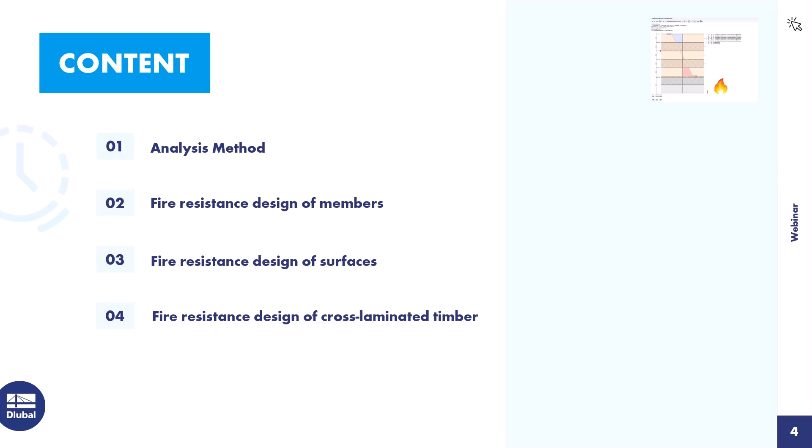We will switch to the program and I will show you the settings directly in the program. But the main focus today is the theory, so that you will understand the background of the Eurocode, how everything works with the charring and with the design afterwards. So we start with theory, then we switch over into the program, we check a few members, we check the design of surfaces, and at the end we will design cross-laminated timber for fire design. Okay.

So the first topic today is about the general requirements. This content here comes from the Bavarian building regulations, and I am sure it is similar in your country. It does not make sense to have a more detailed look into any regulations because we have so many people here from so many countries and every country is a bit different. But I guess in general this sentence says everything, so that's why I read it.

Buildings must be arranged, constructed, modified and maintained in such a way that the outbreak of fire and the spread of fire and smoke are prevented, and that in the event of fire the rescue of people and animals and effective firefighting operations are possible. And I guess it is clear to everyone that this is our big aim.

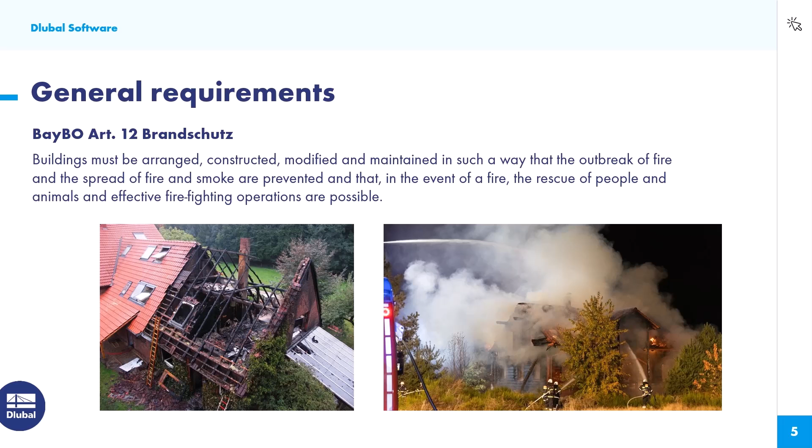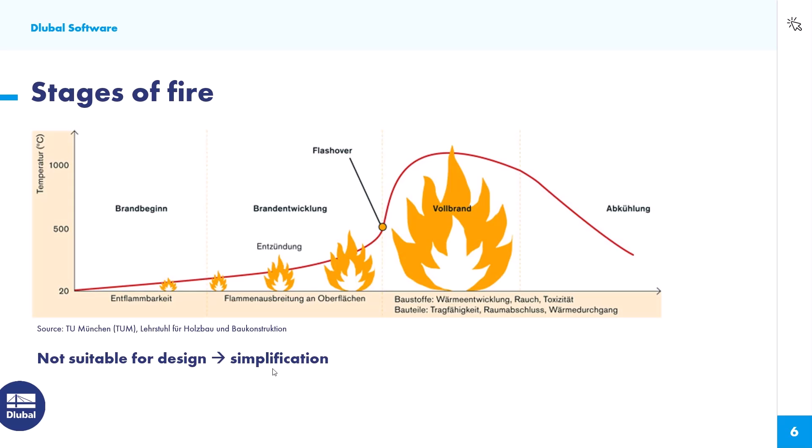Okay, so then we need to talk about stages of fire. The first stage is the non-flaming smoldering before it goes over to the developing fire stage. Then we get the flashover, where we receive the fully developed fire, before it comes to the decay stage. And of course, when we think about this red curve here, you can imagine that this is hard to simulate in a structural analysis. That's why we need a simplification, and how this simplification looks you will see in the next slide.

It's the content of the Eurocode 1, of course not the whole content, but the important content. It's about nominal temperature-time curves. Here we see the standard temperature-time curve. There are a few more temperature-time curves, but for timber and especially for buildings, only the standard temperature-time curve is of interest. That's why it's the only one listed. We see the equation of the time curve. It's a logarithmic function, and the variable is t.

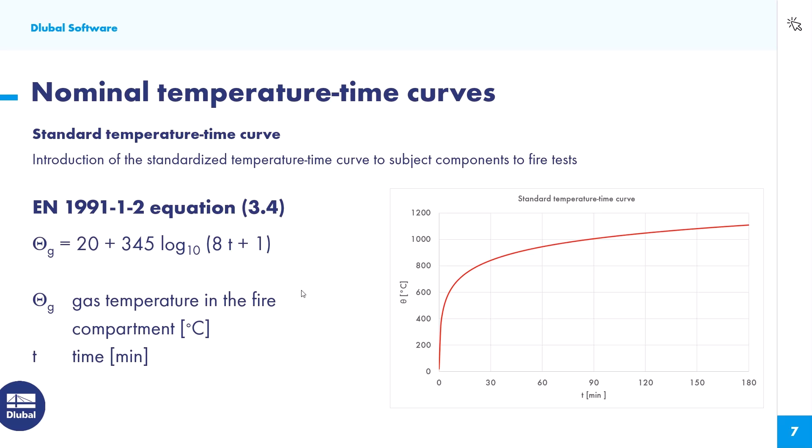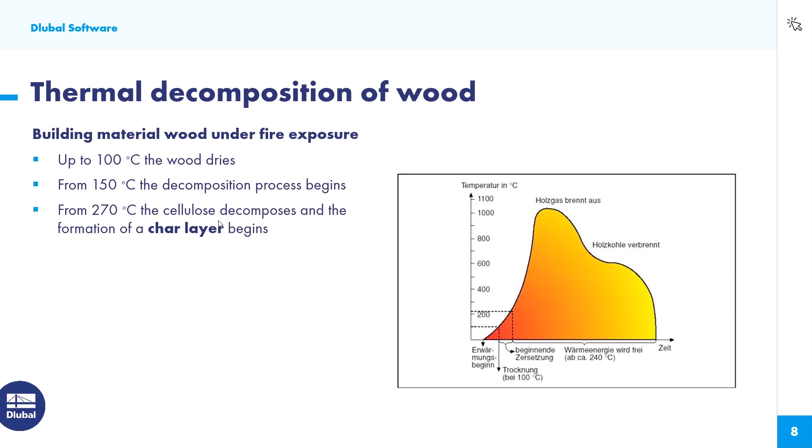Next slide is about thermal decomposition of wood. I guess it's clear to everyone that in the beginning the wood begins to dry. This is up to 100 degrees Celsius. From 150 degrees Celsius, the decomposition process begins. So we are around here. And it has its peak at around 270 degrees Celsius, where the cellulose decomposes and the formation of a char layer begins. This char layer plays an important role, and it's actually the key for our timber design. That's why it's in bold letters.

A few properties of this char layer. This char layer has a lower thermal conductivity than unburned wood. That's why it delays the charring, and hopefully a residual cross-section remains. And that's the reason why we have a very favorable behavior during fire in case of timber. As you see here, when you check the cross-section after a few minutes, I don't know how many minutes these are, maybe 30 or 60, you will see that the timber inside is still brand new.

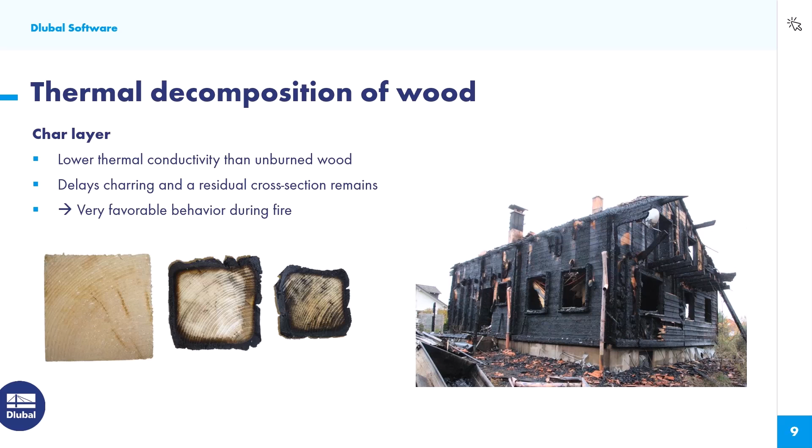Fire resistance classes. So I don't want to spend so much time on it, since I guess that's clear to everyone. We have these classifications. We have load-bearing components and non-load-bearing components, but of course we are focusing on the load-bearing components in our structural analysis. And we need to consider integrity or not. That depends on, of course, the building code or whatever.

In the new Eurocode, this plays a more important role, and also we are focusing on it in the future, but for now we have no integrity. Or we do not prove any integrity, since it is actually not a design check in terms of structural analysis, but as I mentioned, it becomes a more important role in the new Eurocode.

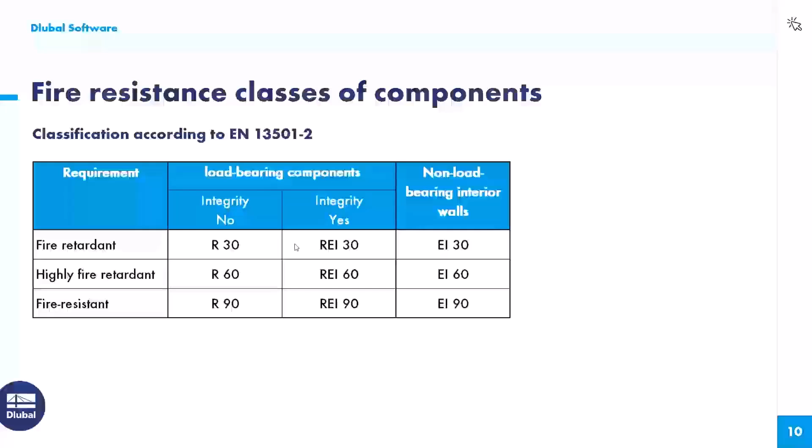Okay, fire retardant, highly fire retardant, fire resistant. I guess that's clear to everyone. We talk about R30, R60, or R90, or R120, and so on. The indexes here are described on the next slides. I don't want to spend much time here. Please check the video afterwards and pause it. You will be able to read it in detail. What we're talking about today, we're focusing only on the load-bearing capacity.

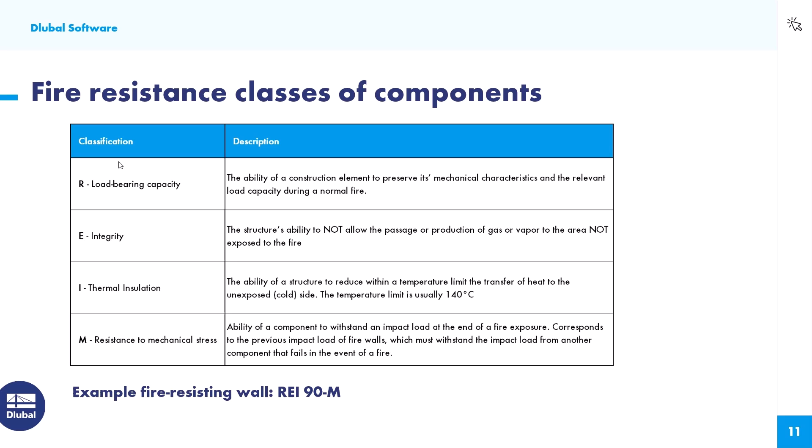Okay, so now let's start actually with the structural analysis part. Combination rules for actions. So we need to know which loads we can or we have to consider in case of fire design. In this case, we have to look into Eurocode 1, which refers to Eurocode 0, chapter 6.4.3.3. And this is nothing else than the extraordinary design situations.

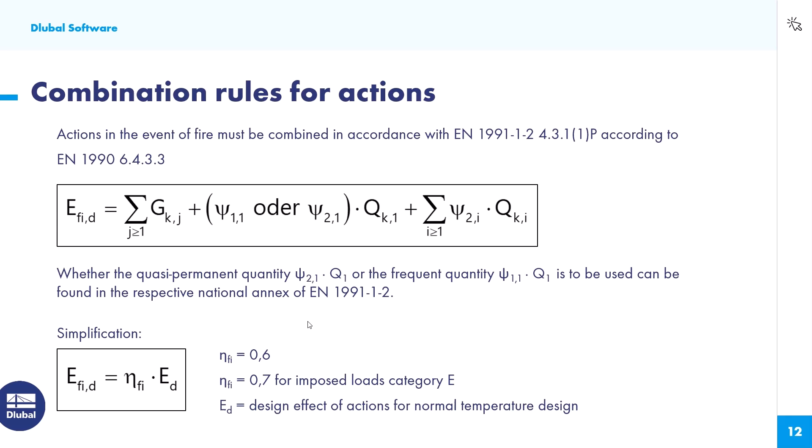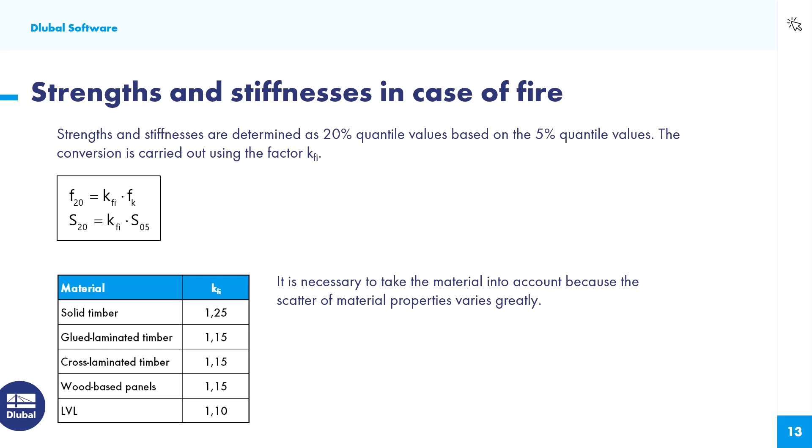Fortunately, there is no additional value in the material standards. They used this conversion factor k_fi, which helps us to keep this database as small as possible. And you see the 20% quantile value is dependent on the material. It depends on the scatter of the material properties, because it varies greatly from solid timber to glulam, for example. And I guess it's clear that the properties scatter because of branches and cracks. Okay, that's it.

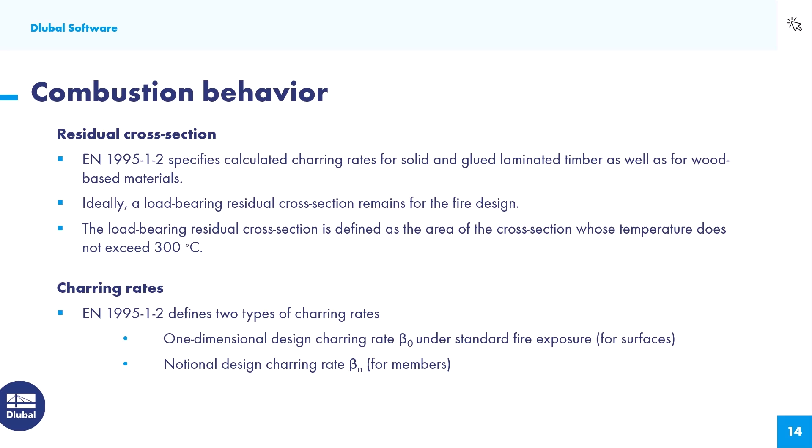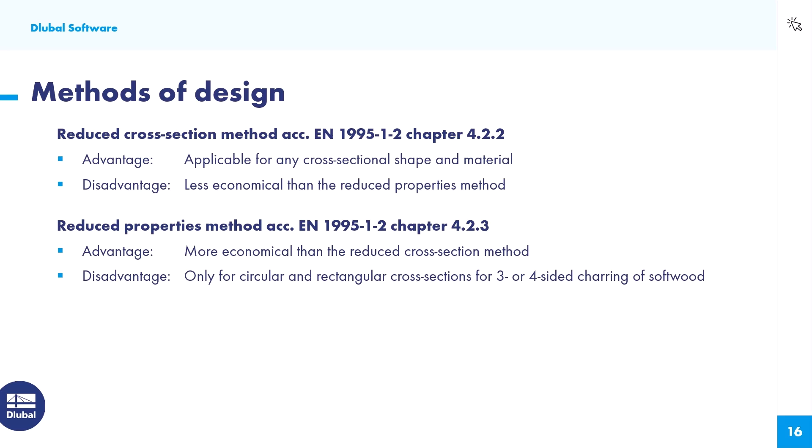softwood as well. Actually, the reduced section method can be used only when we talk about surface design. For example, for CLT, the reduced section method needs to be used. In our program, we consider only the reduced cross-section method, but maybe in the future I'm thinking about also introducing the reduced properties method, since the amount of work is not so high. So I'm thinking about also taking over the reduced properties method for the member design.

Okay, let's have a detailed look at the different design methods. Here we see the reduced cross-section method. We have the initial surface of the member, and it's getting reduced to the residual cross-section by the charring rate multiplied by the time. And since the area between the blue and the yellow line here has also an increased temperature already, and therefore a reduced strength and reduced stiffness, this area should also be neglected.

That's why, for times higher than 20 minutes, the factor k0 is 1 and d0 is 7 millimeters. So additionally we add 7 millimeters to our charring depth. When we go to the strengths, we have a kmod,fi factor, but do not interchange it with the kmod factor from the cold state design, where we have the kmod factor dependent on the load duration class.

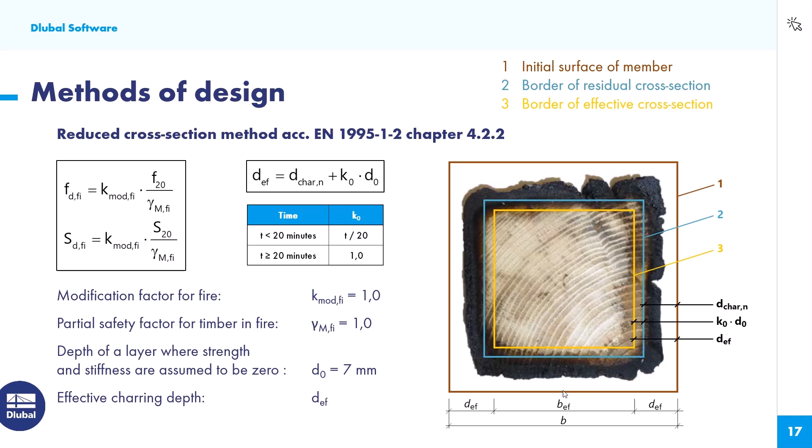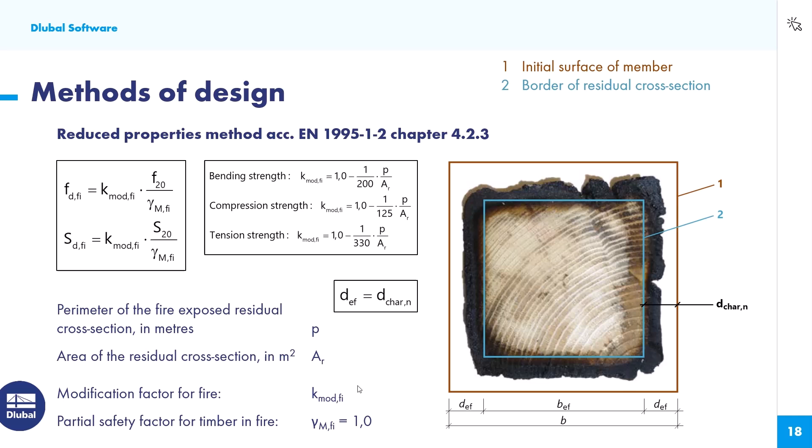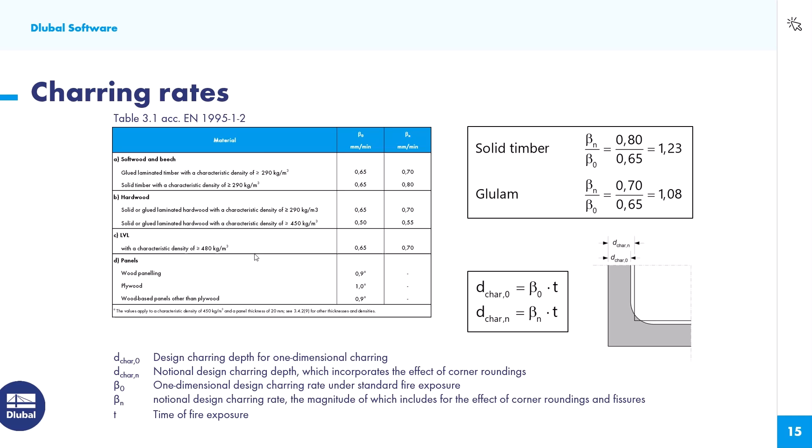Okay, that's it. Let's do a small example for this ceiling beam, which is softwood C24, 140 by 240 millimeters. The fire resistance period should be R30, and the charring should be on 3 sides: left, right, and bottom. So we calculate our charring depth, multiplying the beta n factor from table 3.1. It's this table: solid timber, which is C24, we have 0.8. And multiplied by the time, in this case R30, meaning 30 minutes.

We get 24 millimeters. And we additionally add 1.0 times 7 millimeters, and then we get an effective charring depth of 31 millimeters. Now we take the 31 millimeters 2 times and reduce it, and we get 78 millimeters for the width. For the height, 240 millimeters minus 1 times 31 millimeters equals 209 millimeters. Actually, it's really simple. Okay, then let's switch over to RFEM.

So I'm sorry, maybe I should... I'm sorry. I have loaded the wrong files.

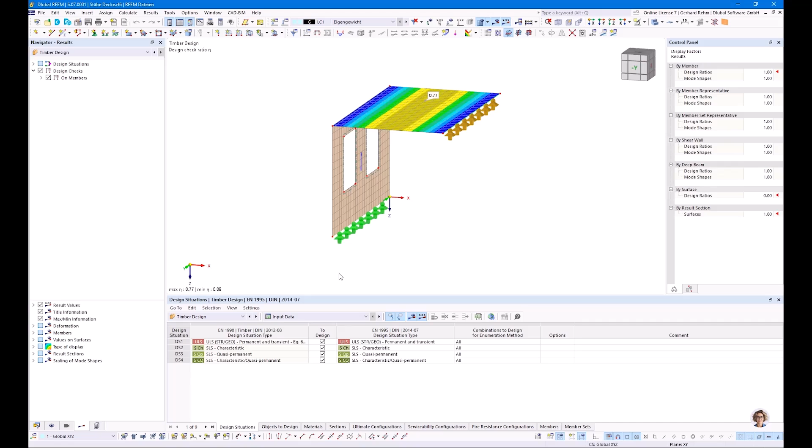Because they were already finished, and of course I want to start directly when our ULS and SLS design is fulfilled. So we see this floor here. I have shown this floor with different variants in another webinar, I guess a year ago or something. You will find this webinar also on our website. And now, of course, I want to extend it for fire design.

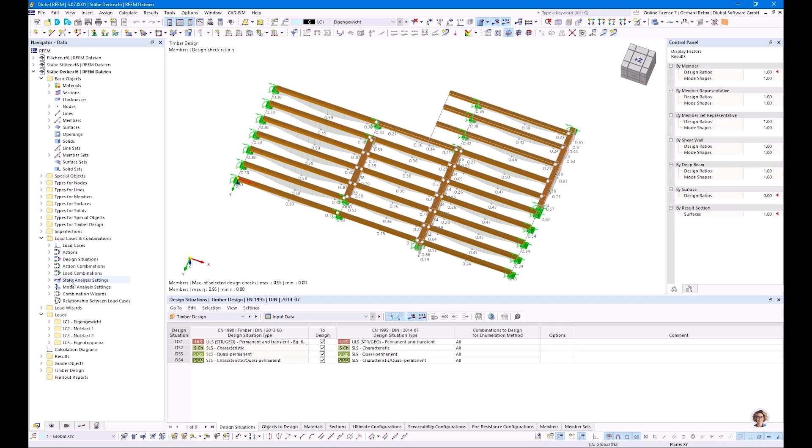And what we will do is we will add an additional design situation, because we need our actions in case of fire. Okay, so I added the design situations here, and I will add another design situation. In this case, I select accidental fire. Watch out, there is also accidental without fire, but this should be used for example for an impact load or something. In case of fire, please use this one here. It depends on the national annex.

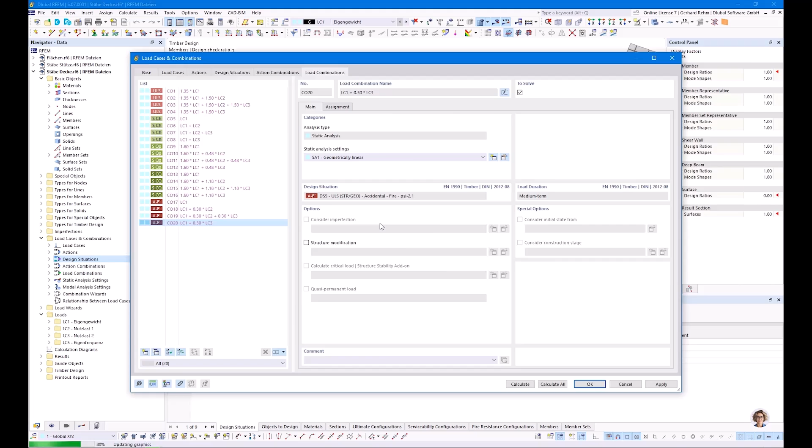Since we have only imposed loads and I use the German annex, I will use psi 2 in this case. Okay, and then we get our load combinations for ULS, cold state, and also the fire state, where we have imposed loads, dead load, and imposed loads on different spans. Okay. Of course, timber design results need to be deleted. We want to add fire design here.

All right, let's have a look at the floor beams. In this case, a fire resistance config was automatically assigned to it. So in case you don't receive any results for fire design, please check if a fire resistance configuration was defined here. Let's have a look at it. Okay, so there are different tabs for members, surfaces, and some standard parameters. So in this case, it's exposed to fire on 3 sides, so not the top side. And we check it against 30 minutes.

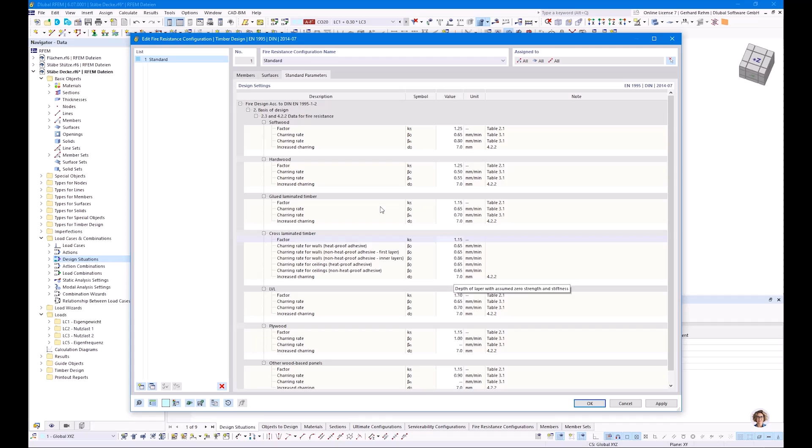And when we switch to standard parameters, you will see all these beta factors for different wood and for different timber material. Okay, and you are able to change these values in case of some special settings from some special approval or something. Okay, so that's actually it.

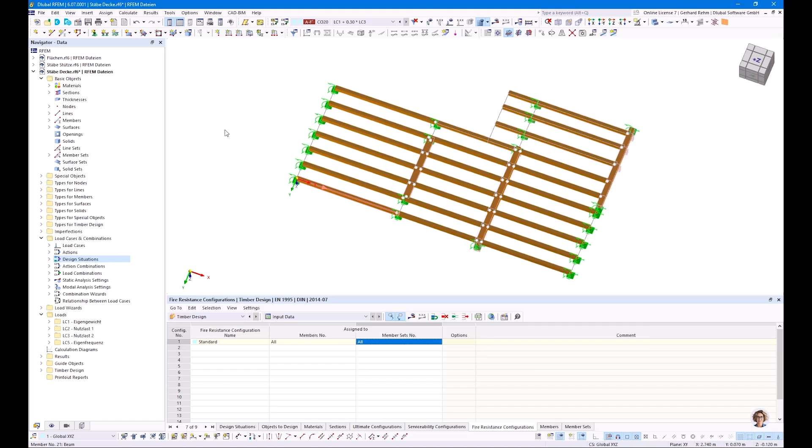So here we can also check which fire resistance config is assigned. So in this case, config 1 is assigned to all members and all member sets. Of course, if some member has a different setting, you can simply switch it here in this design configuration tab. And here you can also create new configs. Okay, so that's it. I guess for now I will run the analysis.

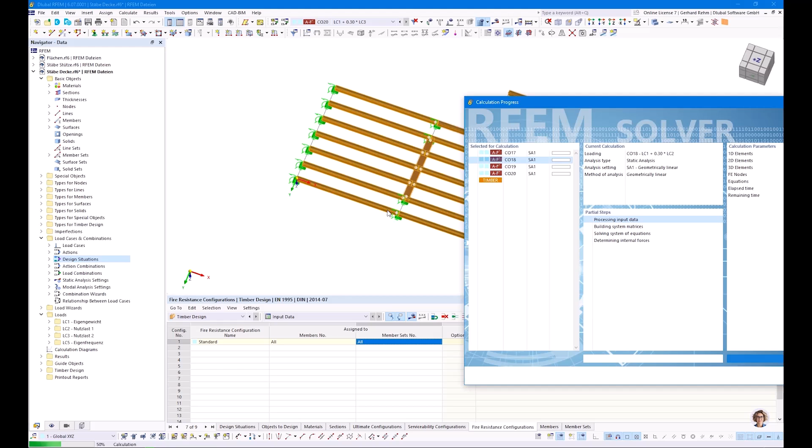And then we will check and compare, because the floor beams here, the ceiling beams, have exactly the same section like my hand calculation. So we had 140 by 240 millimeters. Okay, so let's focus on, it does not matter. We don't take care of the numbers for this example. Let's check this member here, and we check fire resistance. Let's check bending. And let's have a look at it.

So it's not so interesting. We only see how the characteristic value is transferred into the 20 percent quantile value. So we increase the characteristic strength by factor 1.25. So it's okay. And k mod fire is 1.0, and also the partial safety factor for fire is 1.0. Here we get the information about the fire resistance.

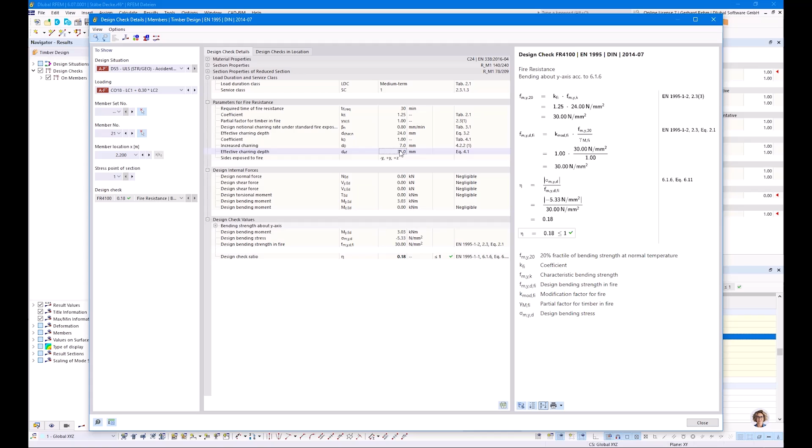So we have a t required of 30 minutes, and we have beta n of 0.8 millimeters per minute for this material, multiplied by 30 minutes equals 24 millimeters. We add additionally the 7 millimeters, and we get an effective charring depth of 31 millimeters and an effective section of 78 by 209 millimeters, which was exactly the same value like in our example here. Okay.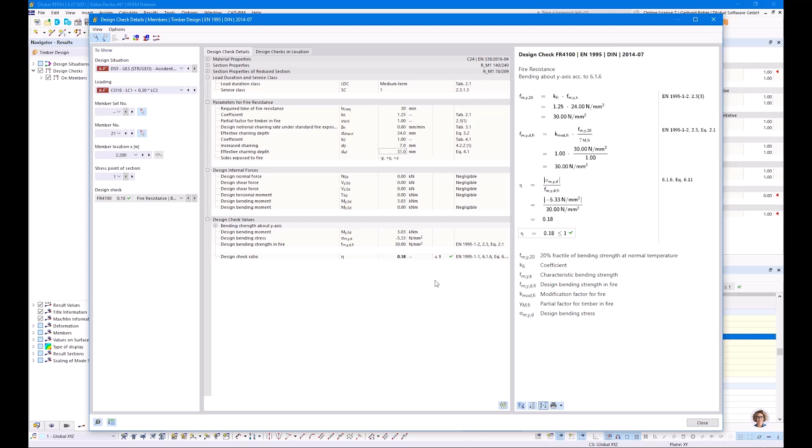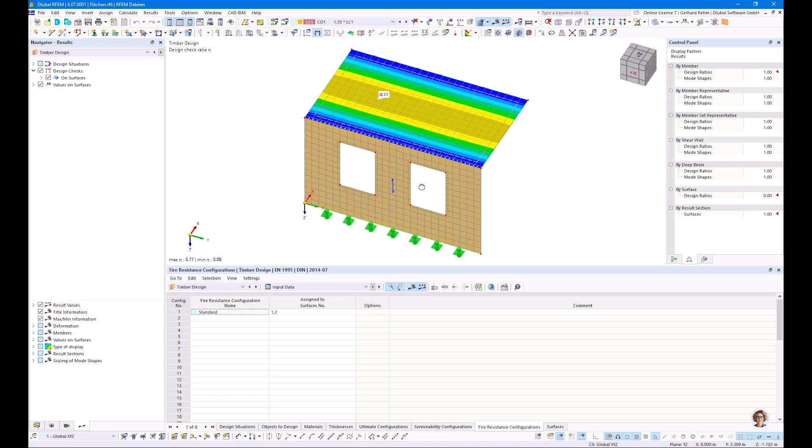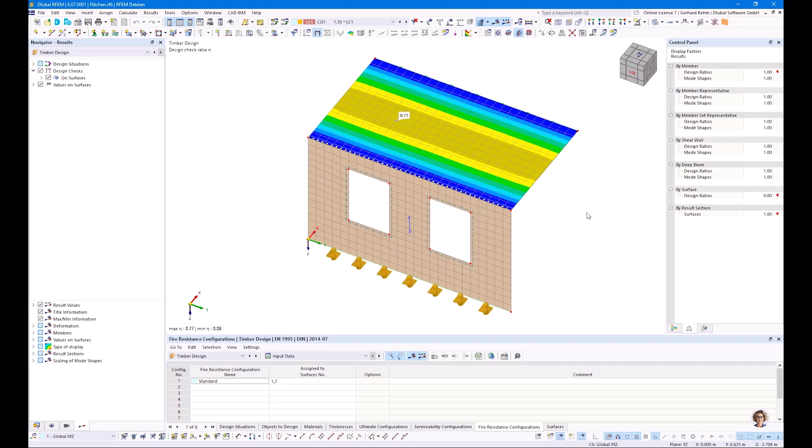Let's go directly to the next example. It was this one with surfaces. So there's a small additional building next to another building, but the other building was not modeled. So that's why I have this fixed support here on this side. There is a line hinge here on this side, and there is a support here on the wall on the bottom side. So this floor here was made of

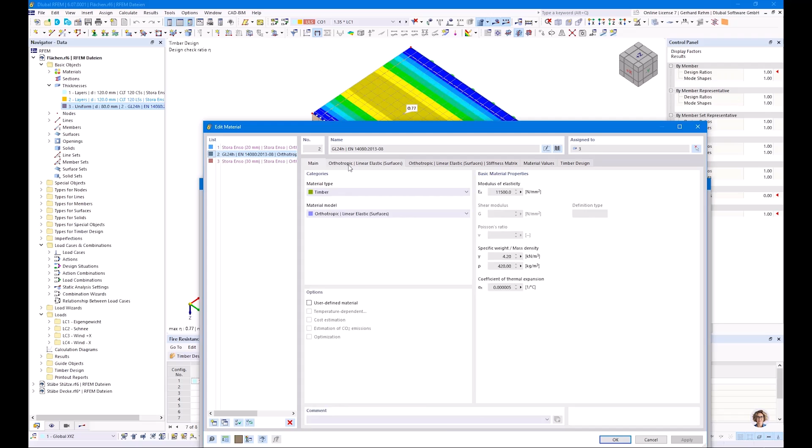an 80 millimeter glulam floor. So it's an orthotropic material model. So let's have a quick look at it. So I've switched to orthotropic linear elastic surfaces, where we have a different modulus in X and Y direction. Of course, this is made of multiple pieces of glulam. So maybe 80 by 625 millimeters or 620 millimeters or something.

And of course, there should be no moment transfer in Y direction of the surface, but since we span it directly in one direction, there is no big difference. Of course, if there is another support here, then maybe we should think about reducing the stiffness in Y direction or adding some line hinges, but for this example, it's absolutely okay.

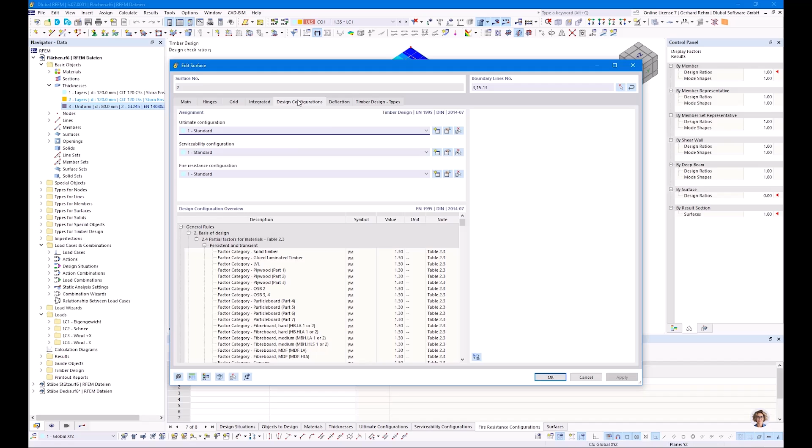Okay, so what I have done here was I have defined some fire config for surfaces. So we check it. Let's check it against 90 minutes. To make some extreme example, you can imagine we have 80 millimeters and we expose it to fire for 90 minutes. Yeah, you can imagine what happens. And we want to have the fire only exposed on the bottom side. So that's all what we enter for now. We come to all other settings later.

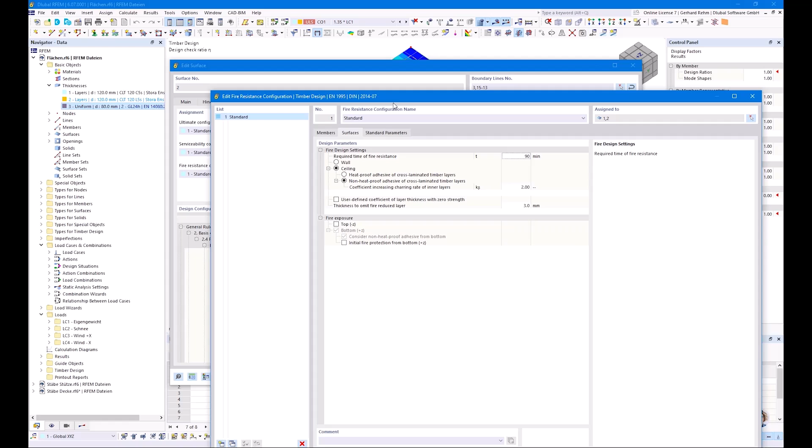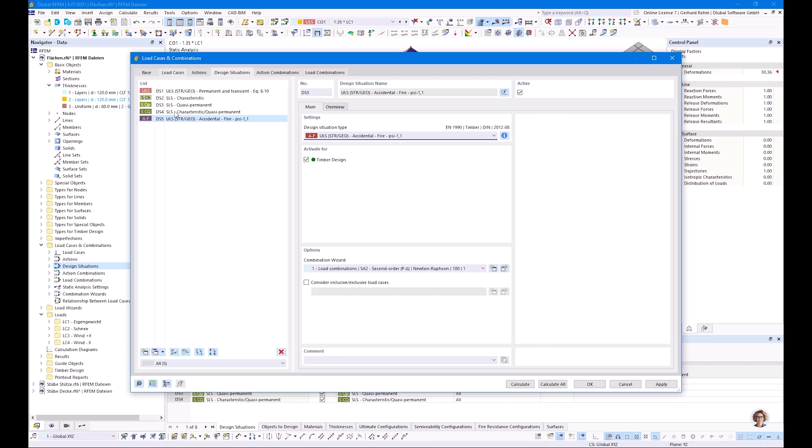Okay, so we need also this design situation. I will add a new one here. So in this case, I select this one because wind is also considered here. So we have dead load, we have snow load and wind load, and we have a really high dead load because I have defined 2.5 kilonewton for load case 1 in this example.

Okay, let's check it. Yeah, we have load case 1, load case 2, which is snow, load case 3, which is wind, and load case 4, which is also wind. As I mentioned for the German annex, this load combination can be neglected, but for now I'll leave it. Okay, so that's actually all.

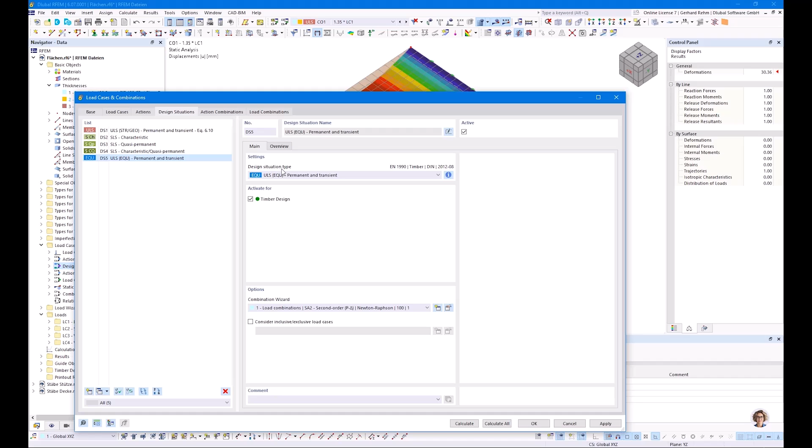Oh, sorry, I forgot to create it. A minute. I hit the cancel button and not the OK button. That's why it was not saved. Yeah, let's use the first one. Okay, that's actually all. We focus only on the floor for now. I start the analysis and then let's check what happens.

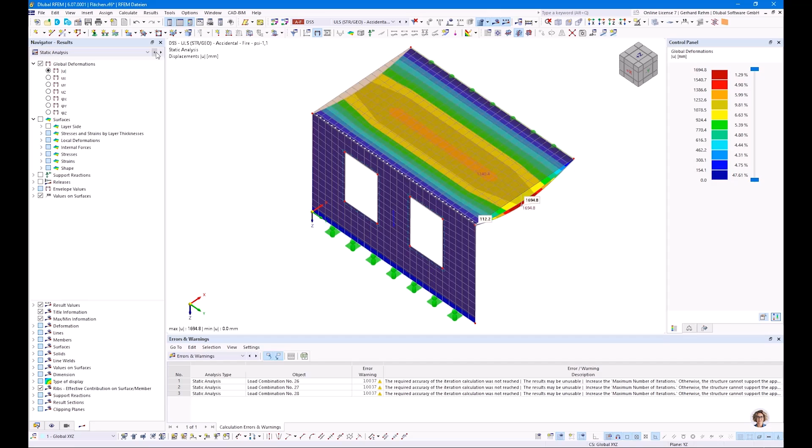So you maybe have a focus on this diagram here. You see already the deformation becomes extremely high. So we are around 1.30 meters, 1.40 meters deformation. And you see there are some errors, but fortunately we get some results. But of course, when we check the deformation for this load case, the maximum deformation is 1.70 meters. The span of the floor has only 3 meters, so it's 50% of the span length.

I guess it's clear that no firefighter will enter this room when he sees that the floor will deform like this. But at least we get results. But watch out, it can happen when you don't take care of it. Of course, it's clear nobody would apply 90 minutes to an 80 millimeter panel.

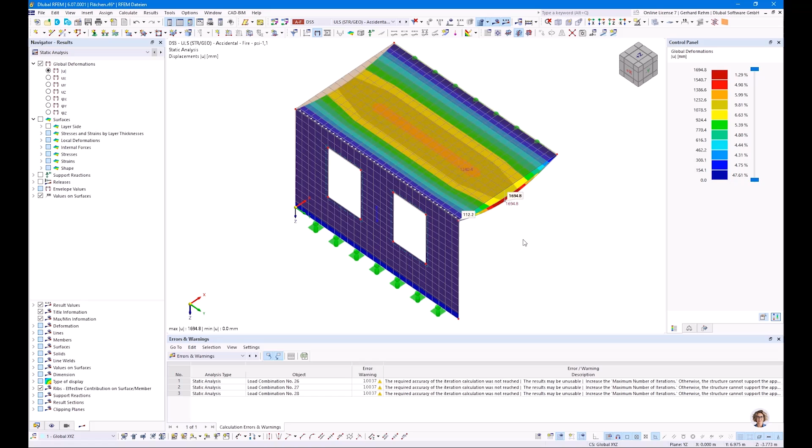So it can happen that the structure becomes unstable, especially when we talk about P-delta analysis, so second order effects. Then of course the critical load factor plays an important role, and the structure becomes unstable under some circumstances. This needs to be considered. Okay, so in this case, it's clear this floor will definitely not work. And when we check the ratios here, you see directly the ratio is extremely high.

Let's check it directly. We will see we have the charring depth here calculated, and the remaining thickness of the surface is 14.5 millimeters. You can enter and see each intermediate value here in this dialog.

But there's also this diagram here on top, or also when you close it and click here, let's switch to the stresses, you will see we had the 80 millimeter and the remaining thickness, the effective thickness, is only 14.5 millimeters, which is of course too low. And the charring depth here can be seen by 65.5 millimeters.

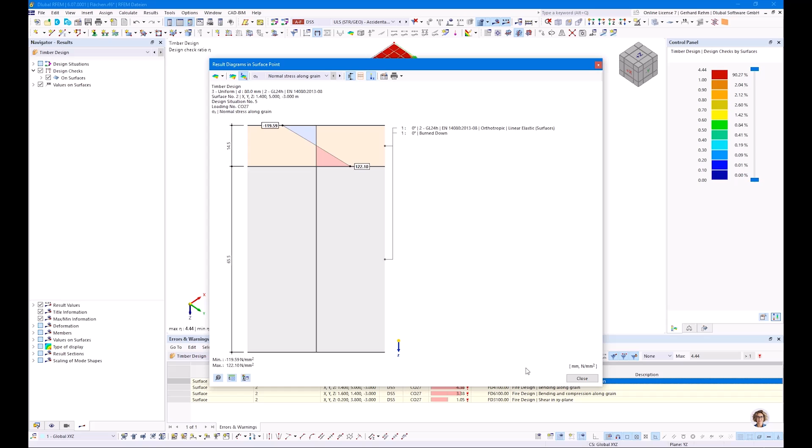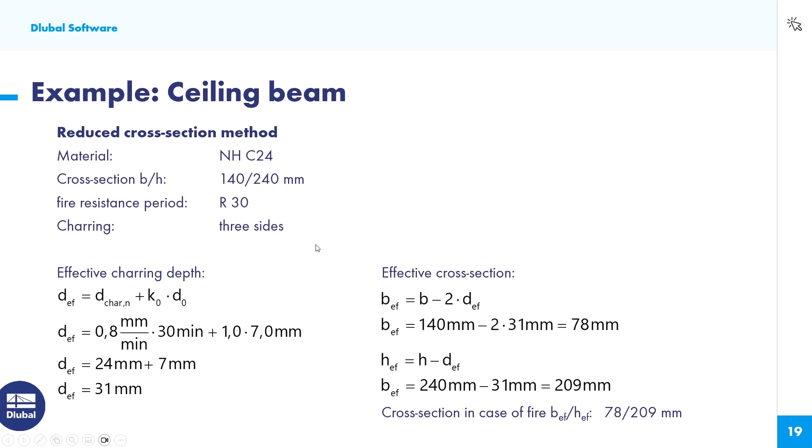And now it's the question how we can fix this. Of course, we can increase the thickness of the surface, but there is another way we can consider. So let's go back to our PowerPoint. And now we talk about initially protected components. As you can see, this is, I guess, the most common case, to cover it by some gypsum boards.

The advantage in this case is we save time, because the gypsum boards, or all other claddings, cause a delay, so the timber will start to burn much later than without this cladding. Of course, it always depends on whether the quality of the timber should be visible or not. But in case it's not visible, then we can apply such claddings.

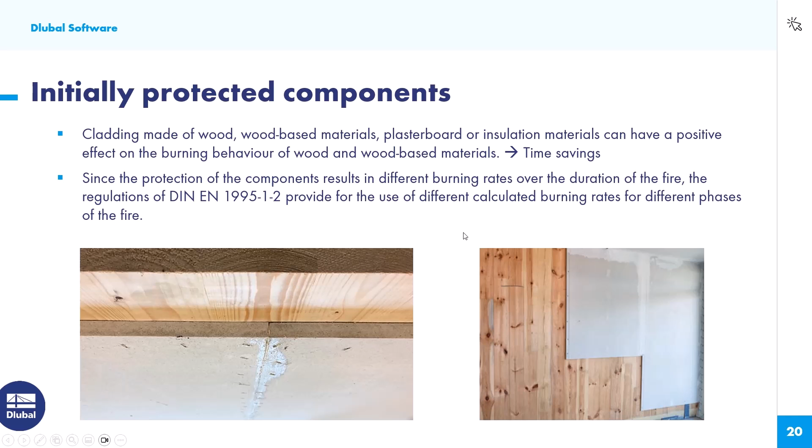The Eurocode describes different stages or phases of fire, and we will have a look at it in detail now. Maybe you have seen similar diagrams like this. So curve 1 is the charring rate for the unprotected surface. That means we have a linear charring rate; the charring depth is nothing else than beta 0 multiplied by the time, and of course it is linear. And the timber starts to burn exactly at t equals 0.

And now we come to this delay when we use some protection. Here we see two different curves, curve 2 and curve 3. We will talk about both curves in detail on the next slides. Here you see the time of the delay of charring due to protection equals the failure time of protection. That means the protection will fall down from the floor, for example, at the same time the fire starts on the timber.

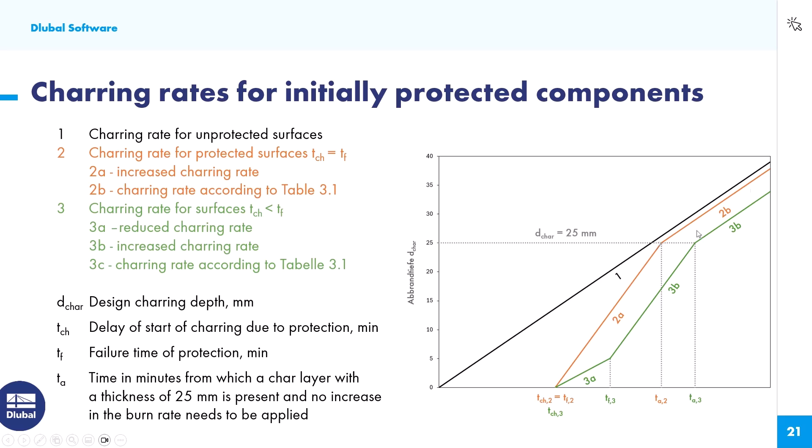Okay, let's have a look at it in detail. For wood-based panels and gypsum plasterboards type A and H, we can use this curve number 2, where t charring equals the failure time of the protection. For wood it's simple: we can simply divide the panel thickness by the charring rate, and then we know the time.

For, I guess, the most common case using gypsum plasterboards, we have equations in the Eurocode for filled joints or gaps smaller than 2 millimeters, or for gaps larger than 2 millimeters. So for a typical 12.5 millimeter plasterboard, the charring time here is 21 minutes. So the fire will start about 20 minutes later.

But as you can see here, we have an increased charring rate afterwards. So at the end, I guess this was 60 minutes, we don't save much time, because here we can consider a linear curve, and here it's bilinear. So we have an increased charring rate here.

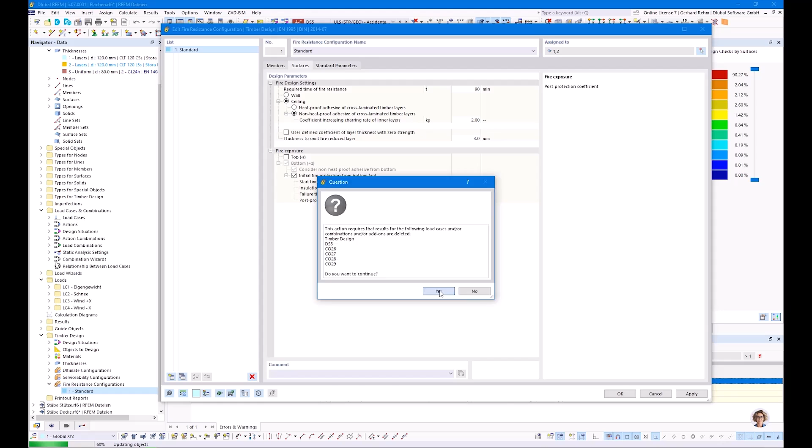In this case, let's start with tf equal t's charring, and this increasing factor K3 should be considered with 2.0. So, okay, we need to recalculate everything. As you saw, also the internal forces and the results from the load combination for the accidental actions got deleted because we sent the reduced section to the solver. So all the stiffness is considered with a reduced stiffness for surfaces.

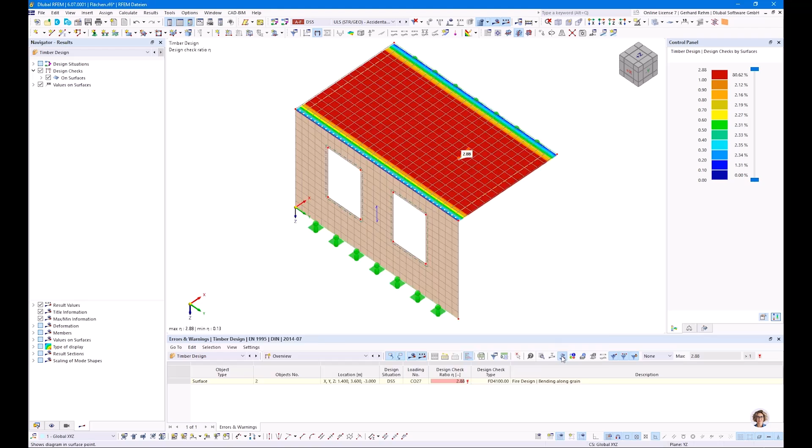Okay, when we run the analysis again, before we had an effective section of 14.5 or 14.8 millimeter. Deformation was at 1.60 meters. Now we get a deformation of around 1.30 meters or 1 meter or something, a ratio of 280%, of course, still too high. Let's check the thickness. Okay, we won 1 or 1.5 millimeters, so not really much.

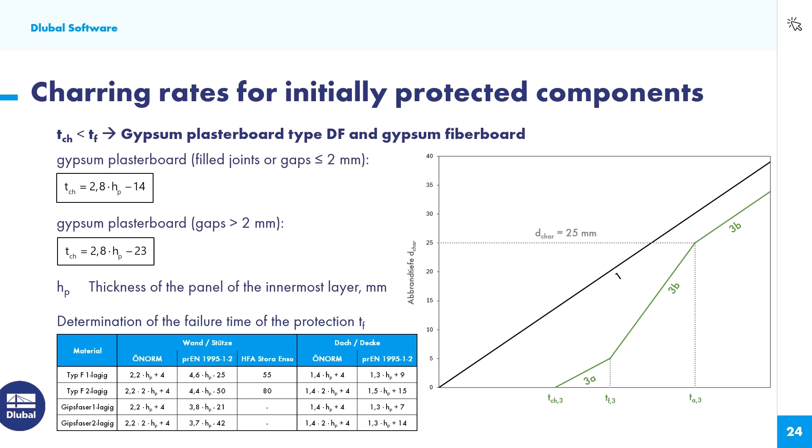Okay, let's go here to surfaces again, and maybe let's try the value from the ÖNORM or from the global Eurocode. Let's switch to 31.5 minutes. But sorry, my mistake. It was for the walls. In this case, we should consider here the floor. In this case, maybe better to use two-layered. So this is this cell here. It's 1.4 multiplied by 2 by 12.5 millimeters plus 4. Becomes 39 minutes. Okay, so maybe better directly to use 39 minutes here.

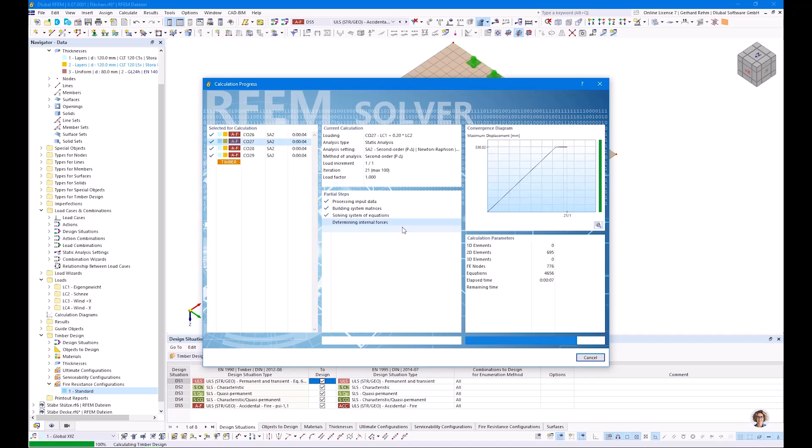And then let's see how far we can go, and maybe we come close to the 100% ratio. Okay, the deformation is at 30 centimeters, which is not too bad in case of fire, and the ratio is close to 100%, so it's 1.31. Since we have already 2 layers of gypsum board on it, maybe it's worth to think about increasing the thickness of timber. In this case, I'm nearly sure an increase of 100 millimeter glulam will be enough in this example. But okay, that's okay for now.

Time is running quick. Maybe switch over directly to the slides and have a look on CLT, which has some special rules. Before I start with CLT, as you know, it's not directly regulated in the current global Eurocode. It is covered in a few annexes like the German and the Austrian one, but this timber design is not part of any annex. So this is actually the current state of the technique, and it will be also part of the new Eurocode, and it is also already in some approvals from producers. For example, Stora Enso uses this approach, and also a few others.

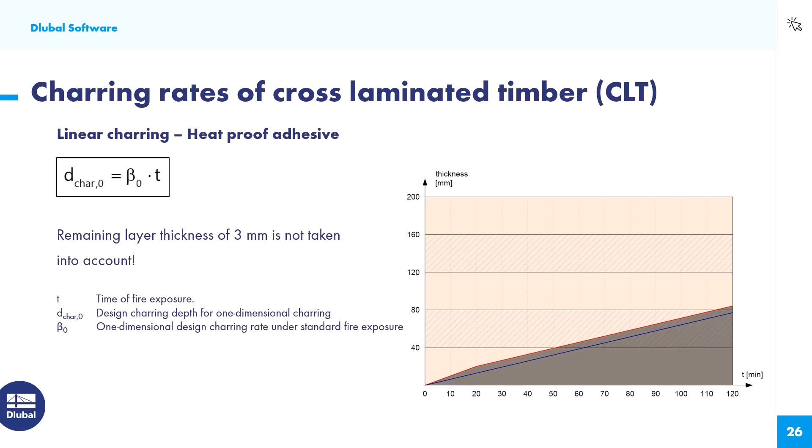Maybe there are producers which use heat-proof adhesive, but it is more common to use non-heat-proof adhesive, like the polyurethane adhesives. In this case, we need to consider a non-linear charring, because the temperature influence on the adhesive causes delamination. Let's have a look on this image here. You will see this is a CLT floor. You see the longitudinal layers and the transversal layers here.

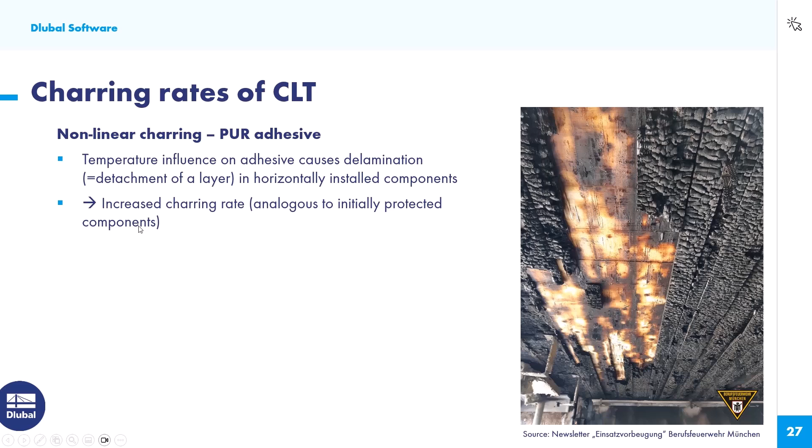And you see this char layer, which actually helps us to reduce the fire, is completely gone within a second. It is there, then it falls down, and then there is no protection. And the temperature in the timber is really high. It's really dry, and you can imagine there is an additional increase in charring rate. It's actually similar to the initially protected components. There we use the same approach, and you will see on the next slide.

So the first area is 0.65 millimeters per minute, for example. And then we come to the second layer. So let's assume the layer falls down. The timber behind is already threatened with a high temperature. That means we get an additional increased charring rate. In this case, we call it k beta. So it's also factor 2, similar to the initial.

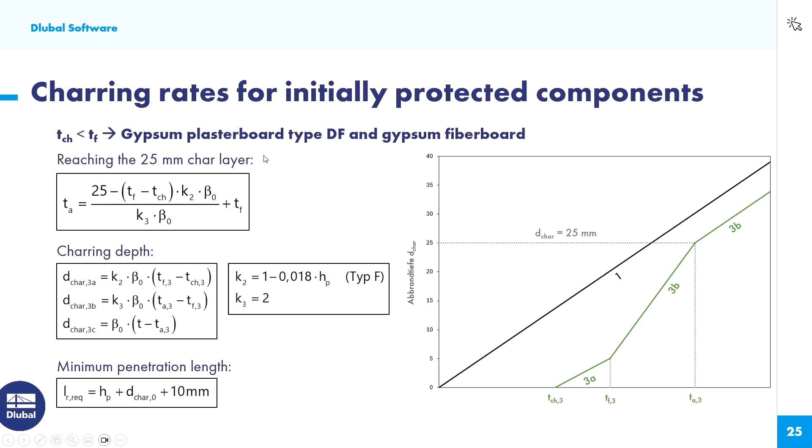Let's switch to this slide, to these initially protected components. And here we go. When the char layer actually reaches 25 millimeters, we can continue with the normal charring rate, and then it starts from scratch. So from here again, and so on.

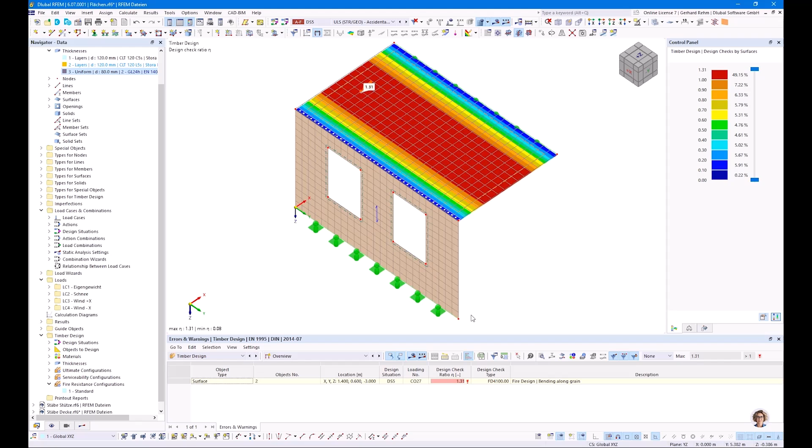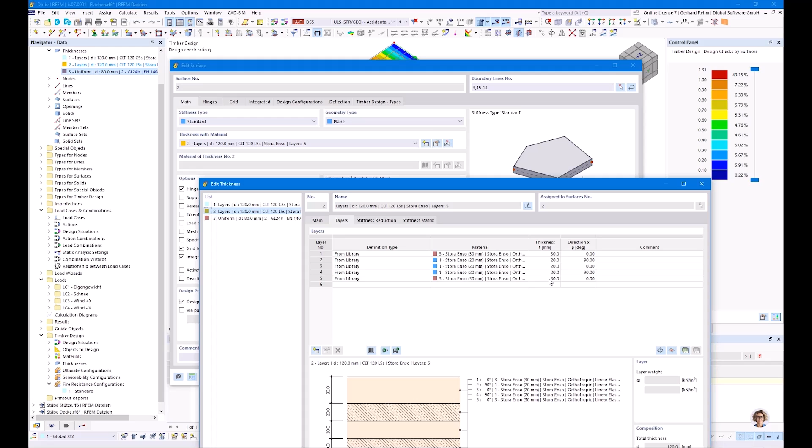Let's have a look into the program again. So I will replace this layer by layer number 2. I have prepared it already. It's a 5-layered Stora Enso composition with 30, 20, 20, 20, 30 millimeters. The span direction can be checked here with these blue arrows. You will find them in the display navigator, surfaces, layer direction, and I display the resultant.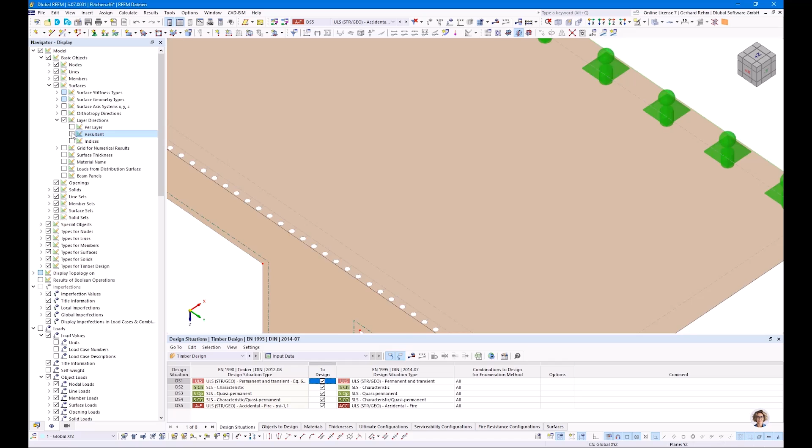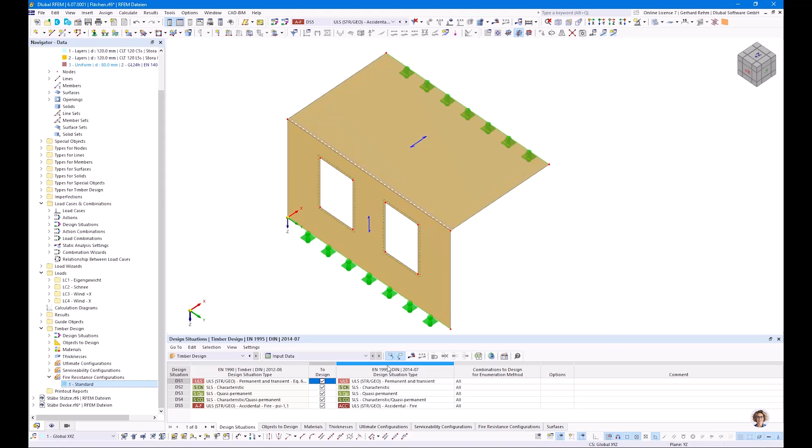Of course, you are able to also add per layer and with indices, and then you will see the layer direction directly. But for this example, I prefer to see the resultant stiffness direction. Okay, let's leave the settings like we had before and run the analysis again. And let's see the differences between the CLT and the softwood or solid timber.

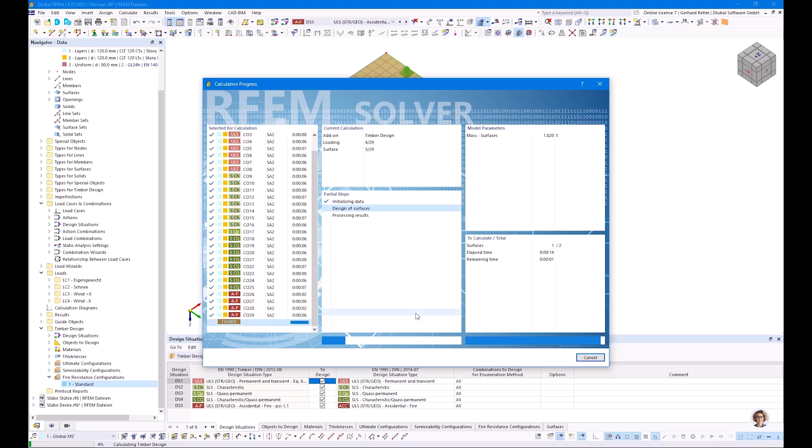Okay, deformation was not really high. It was around 120 millimeters. Let's check the ratios for, let's say, higher than 20%, and we get a smarter overview: ULS design is 20%, SLS around 31%, and fire design will control in this case with a ratio of 79%. Let's have a look at it in detail.

So we check the charring depths and we get the information directly. Layer number 5 fails, number 4 fails, layer number 3 fails, and layer number 2 will be reduced to 12.6 millimeters. Of course, it's much easier and nicer to see the effective section here in this dialog.

Maybe we switch to stresses again. You will see 77.4 millimeters will fail, 30 millimeters on top will remain, and on the second layer, 12.6 millimeters will remain. But since this is the transversal layer, this layer is not able to support the first layer. That's why the stresses are only considered on the top layer. And this helps us a lot to understand the effective section.

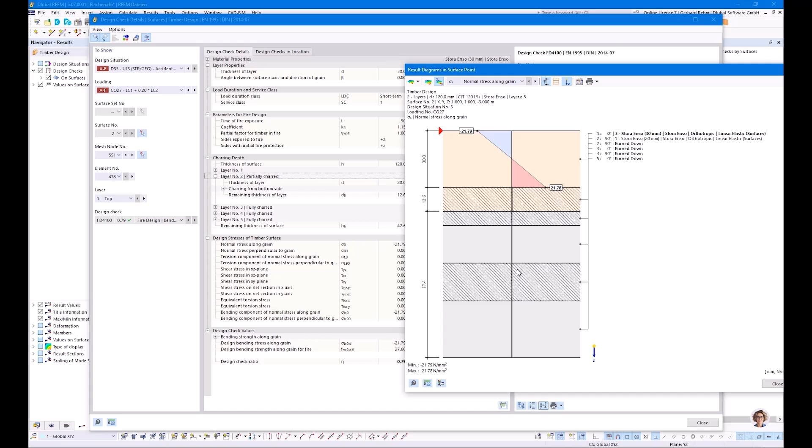But of course, I agree. Checking the charring rate inside the tables is sometimes a bit tricky. You can check each intermediate value, that's clear, but it would be much smarter to see it graphically. That's why we are introducing, finished in a few weeks, this time course monitor, where you can see the charring depth over time. This helps you a lot to understand and compare it with my slides in the PowerPoint presentation.

So for example, here on the right side, that's a floor, and we see the border of the residual cross section, and we add the 7 millimeters here. That's covered by this red line. So we have a protection, because the burning starts at 21 minutes in this example. And then we have the double charring rate.

Then we reach the 25 millimeter limit. Then we have the normal charring rate again. And then from the beginning, double charring rate until we reach 40 plus 25 equals 65 millimeters. And then we continue with the normal one again. On the left side, we see a wall. On this side, it's not covered with the protection.

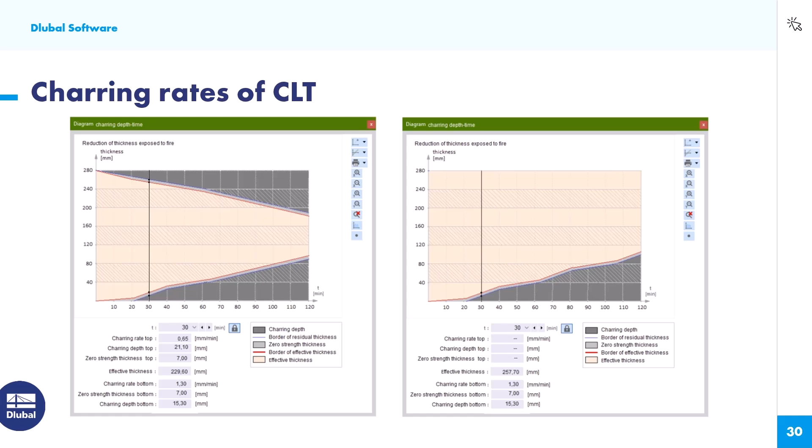rate. On the bottom side, we see a protection, and here it's the same. We start with the increased charring rate until we reach the first or the second layer, and then we continue with this 0.86 millimeter or whatever you have defined in the fire design config. So here you will see for cross-laminated timber, and dependent on if you have heat-proof adhesive or non-heat-proof.

Oh, I forgot to show you. Here in this surface dialog, you will find the distinction between wall and ceiling. When you select ceiling, then this approach here will be used. And when you select wall, this approach will be used. Of course, the program does not know if this is a wall or a floor. This needs to be a user input. And dependent on the setting here, you will get this.

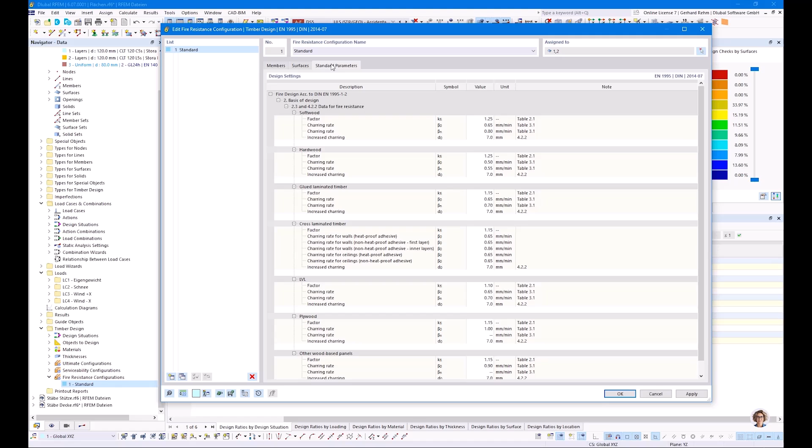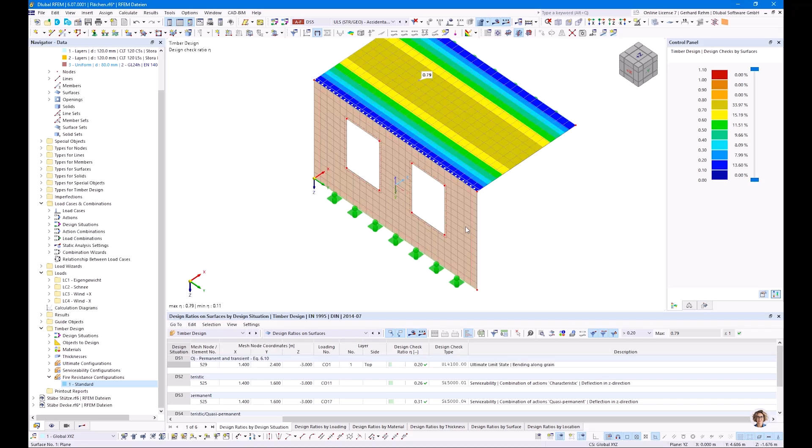Time is already over, but I will show you the wall configuration. So you need to create a new fire config. So I create a new one. For surfaces, you can switch over to wall in this case. Define your required time and your settings. If it's exposed on top or bottom side, top is always -z direction and bottom is always +z direction. So when you right click on the surface, you can activate the local axis systems here, and then you see, plus is in plus direction and minus is in minus direction.

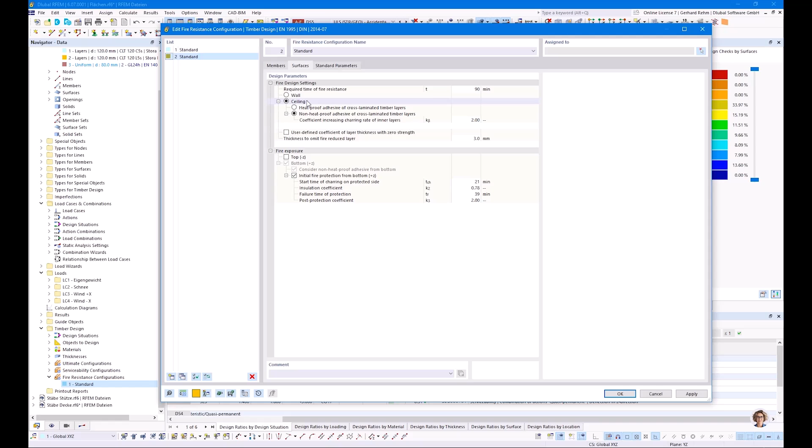And don't forget to, wait a minute, I forgot it. I will switch over to wall, or maybe I don't want to create a new one. I want to create a copy, and I will switch to wall. Okay, and now I have assigned the wall config to my wall.

Okay, so for now, that's it from my side. I'm thinking about doing another webinar on this, especially when we talk about wall design, especially about buckling design of CLT. We had already a webinar about buckling design of CLT in RFEM 5, which can be taken over actually to RFEM 6, but maybe in the future I plan to do a webinar where I show also the eccentric effects and the buckling effects on these walls, for example.

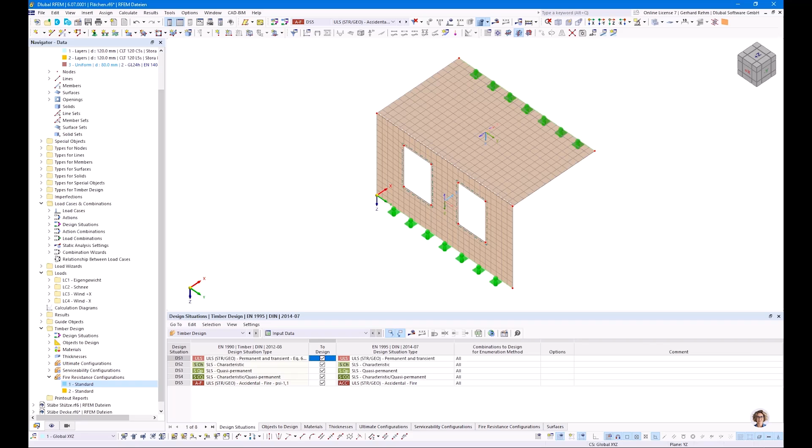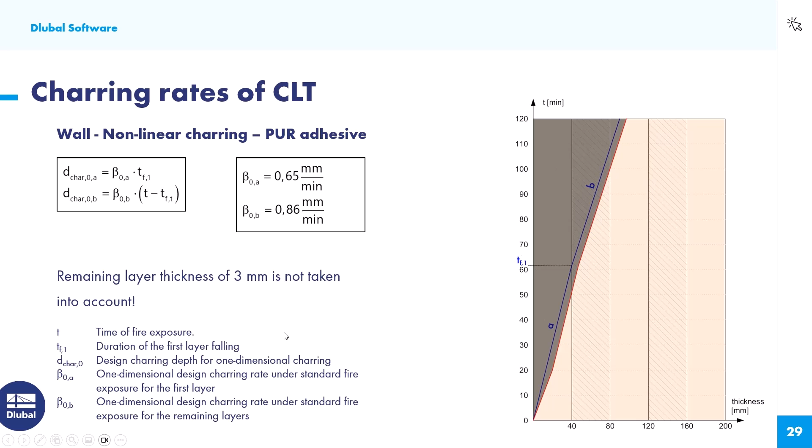Okay. So as you saw, it was really focused on this PowerPoint, but I was focused on all this information to provide also to following users to watch the webinars and to learn about this fire resistance. This helps the user, of course, 24/7, and of course this helps us in the hotline where we don't have to answer the questions because you can check it out in this webinar. And hopefully I fulfilled your expectations, and that's it for now. Hopefully I did not forget anything.

Oh, maybe some words on literature recommendations. Unfortunately, I'm not familiar with English literature, so I know only the German ones because the German ones are already really good. I'm sure there is English literature, but I have no clue about it. Maybe you can send me some English literature sources, and then I can add it to this PowerPoint later.